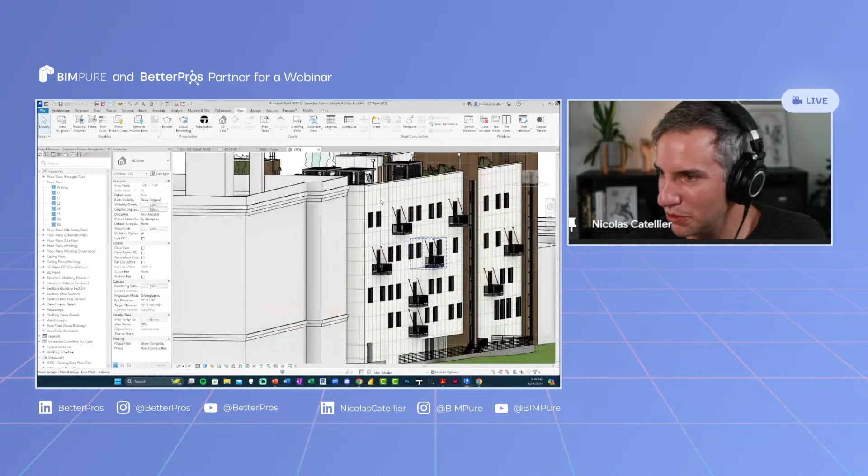Do I have Revit? Maybe I should show it for a moment. Yeah, there it is. So that's a sample model, the default Autodesk project with the most recent release. So let's say that there's this wall right here, and you're worried that it's going to be moved or deleted. You can hit this little pin icon, and suddenly you cannot move it unless you unpin it. So all the major elements in your project, make sure to pin them.

Next, similar to a slide that I've showcased earlier, but develop a powerful template. So with BIM, much more so than CAD, a powerful template is crucial. Basically, you're taking time in the documentation coordination phase and pushing it into the templating phase.

It means in your template, you already have content. You have typical walls, typical windows. You have standard detailing. You have standard wall composition. And instead of doing all that work in the middle of a project, it's already done in the template.

So a template is built over multiple months, multiple years. It's constantly improved. But with a good template, you will save so much time, and it's going to be much more pleasant for you to work inside of Revit.

Something though, you need to have some non-billable hours to work on the template. That's something that sometimes partners don't realize, that you need, like the BIM manager in the firm needs maybe 5 hours a week, or that's actually pretty conservative, but time to work on the template that's not billable to specific clients, right? But that means that in the future, they will save time on upcoming projects.

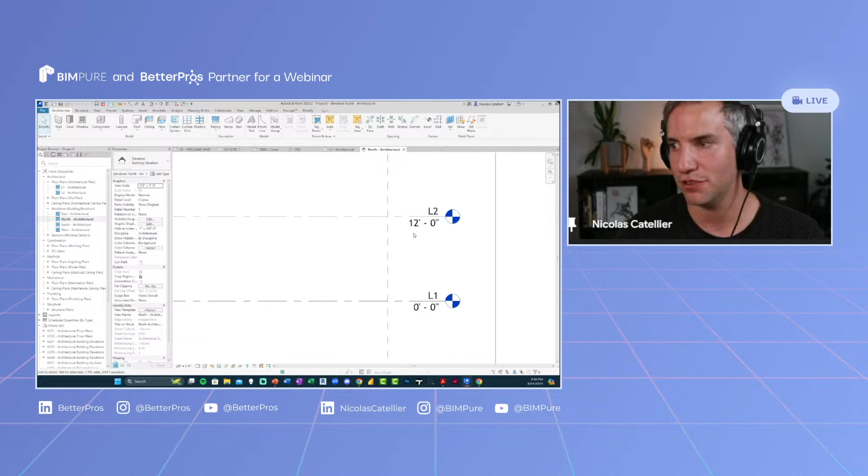I have a few files open here. This one is the pro template that I use. Let's just create a new project from scratch. I'm using the latest version of Revit, let's use Imperial. So when you start a new project in Revit, the first thing you need to do is set the levels, typically level 1, level 2. I'd set that up because all elements in Revit are constrained to levels. So if you model a wall, the bottom will be at level 1 and the top at level 2 most of the time. So the first thing I'd do is set these up properly.

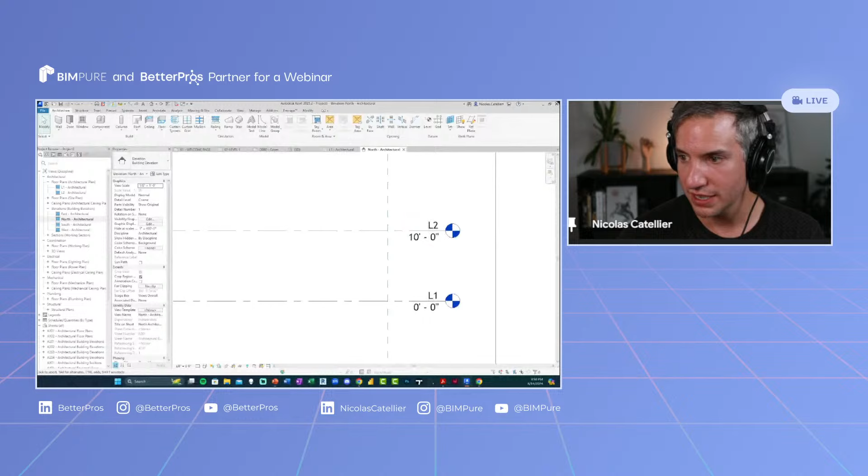Something else is understanding visibility. In CAD, people use layers to control visibility, thickness of elements, line styles, and so on. In Revit, what you see on the screen is what is going to be printed. A tool I like to use a lot, let's go to another project - this one, I have a tool called Thin Lines right here, and it turns everything to a thickness of a single pixel. When you're working, this is super helpful to be more precise and see what's going on. But if you uncheck this, you can see how it's going to look when printed. That's an advantage of Revit - you don't have to mess around with layers and plot styles, which is kind of boring in my opinion. We shouldn't be doing that in 2024.

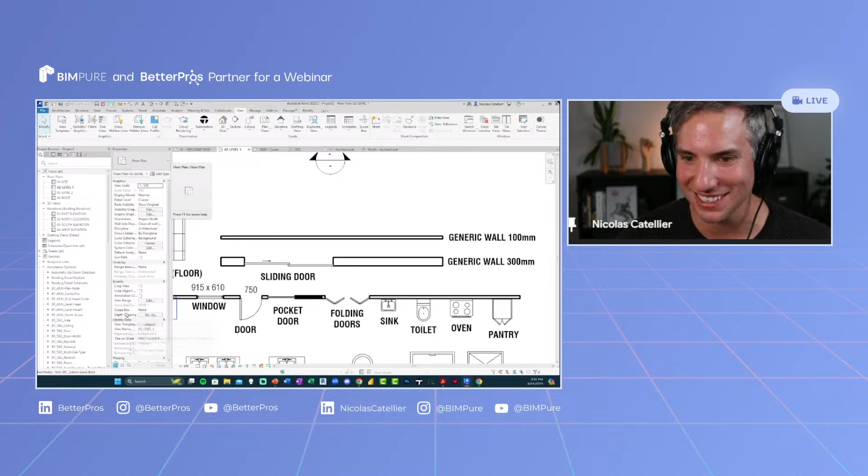The project browser - make sure to keep it organized. When I open a Revit model and see what's going on, that's one of the first things I check. If I see complete chaos in there and a lot of duplicated views, it's typically not a good sign. It's like when you enter a clean house, you're more careful not to be messy. But if you enter a house that's chaotic, a complete mess, maybe you don't pay as much attention to be careful and keep it clean.

So that's something I mentioned earlier, to try to keep healthy Revit models. Something else, always use link CAD. Don't import CAD, because when you import a CAD file into a Revit model, you actually import the whole file, and it's making the Revit model much bigger. So link is always better in this case.

And the worst thing that you can do inside of a Revit model, please never do this, never, no excuse. Never explode a CAD file inside of Revit, because every single layer is going to be converted to a line style in Revit. Just one of the worst things. I think they should remove this tool, honestly.

Okay, and something else that I recommend, I mentioned it earlier, but work side by side with a plan view or 2D view and a 3D view. Keep the 3D model open.

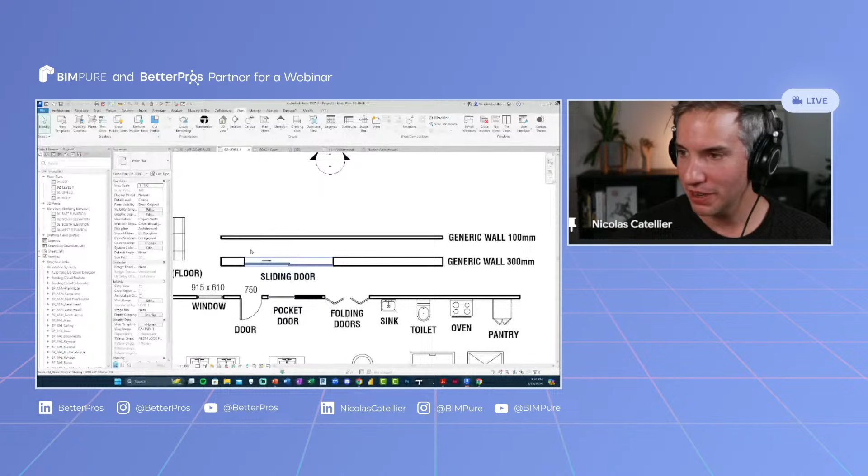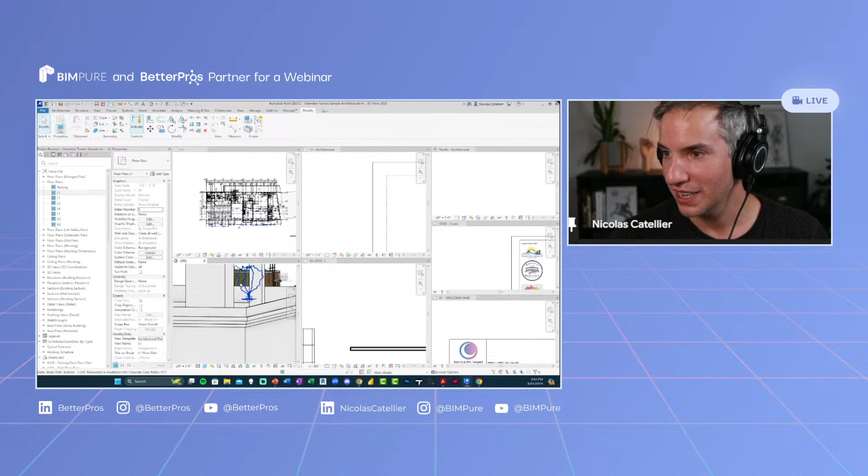So for example, if I'm here, let's say, what's this project? There's a shortcut in Revit, it's WT, window tile, and you can have multiple views open at the same time. If you have multiple monitors, you can put them on different monitors. So you can see there's probably way too much stuff, but in this case, I can see the 3D model and I can have the floor plan. If I do a change in one of them, I should see it in the floor plan. So it helps a lot to work with multiple views.

I mentioned this earlier. All the key elements in your model, make sure to pin them. I've just seen so many times that people forget to pin the elements and they get moved by mistake.